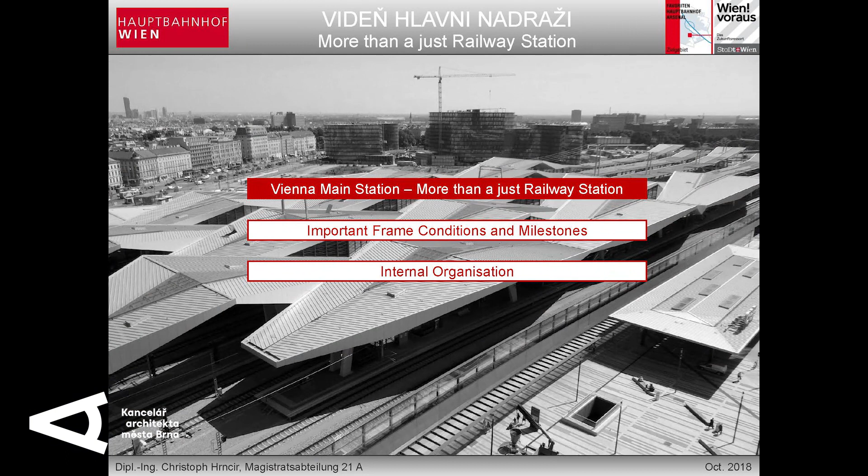So, Vienna Main Station, more than just a railway station. One aim of the project was to connect three railroad lines going through Vienna into one transport hub. In former days we had head stations in Vienna; now we have a European railway hub connecting all these lines at one point. It was very important for us to have a modern station building. The old South railway station was one of the most ugly station buildings in Austria. Now we have a modern, state-of-the-art station building fulfilling the criteria of a European transport hub.

But we don't only talk about the station building itself. We have a large development area of about 55 hectares, and within it we've built—many already finished—about 5,000 flats, maybe a little more, providing living space for about 10,000 to 15,000 people.

But not only a place for living and housing—we wanted to create places to work too. So it was one of the aims to get office buildings in this quarter. There are some headquarters, one of an Austrian bank institute, one of the railway company itself, opposite the station building, naturally hotels and so on. So a mixed-use quarter. We had infrastructure needs—schools, technical infrastructure, new roads had to be built, and so on, naturally public green areas too.

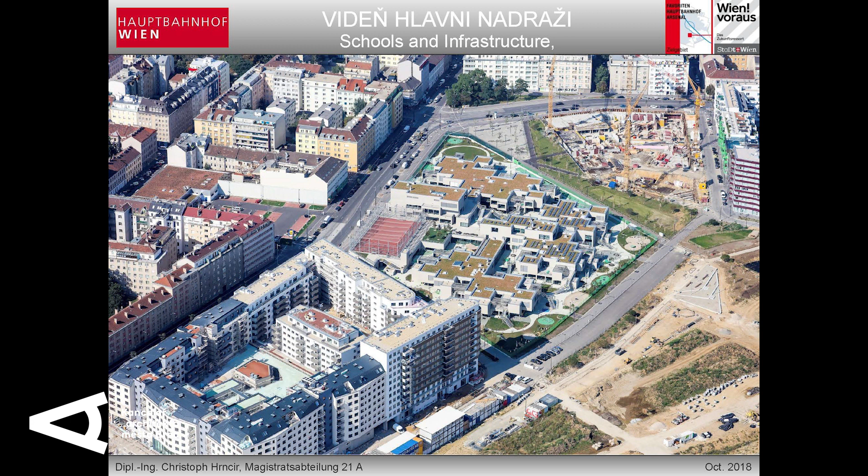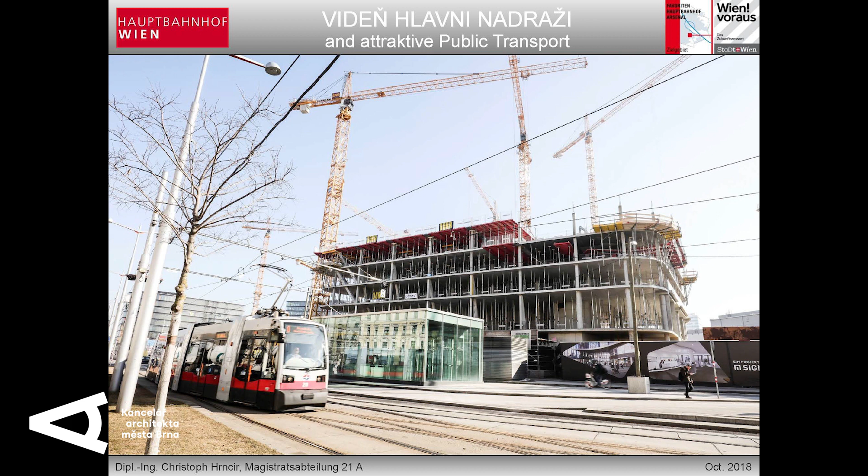The heart of the housing area is a 7-hectare public park, and as well new public transport. One project is the enlargement of a tramway line, for example, but also the connection of the station building to the underground line was a very important topic we had to deal with, because the old station was about 500 meters from the underground. Now you can go directly from the station building to the underground line.

So that's the overview of the project.

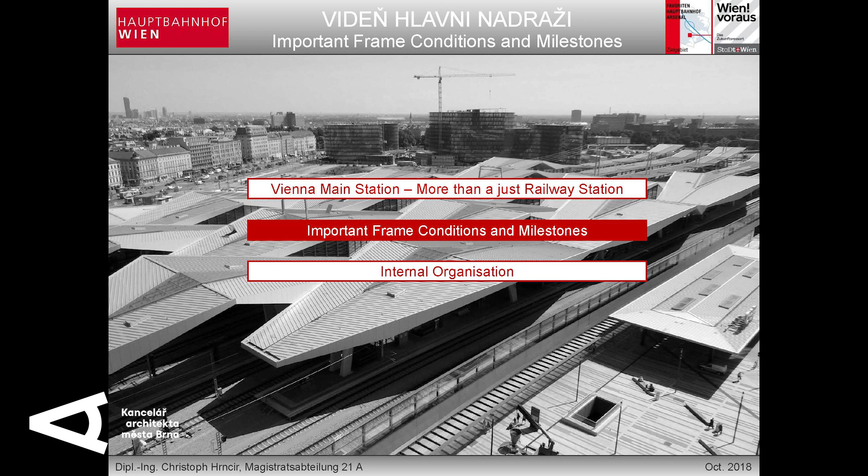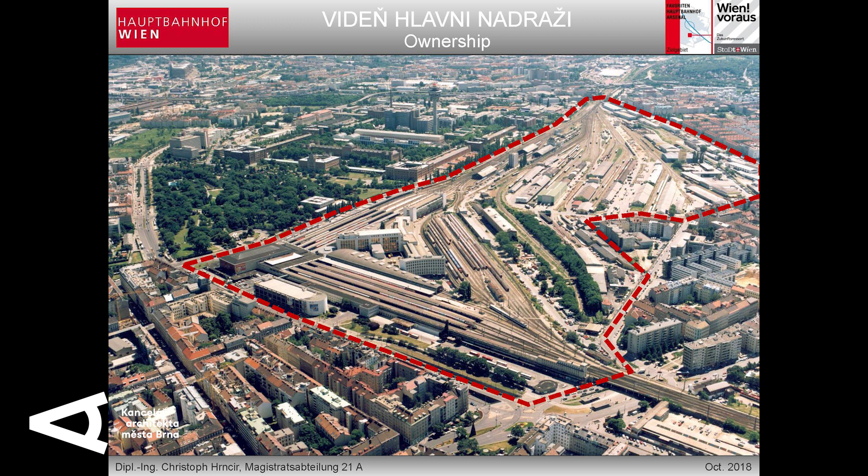What were the important frame conditions and milestones? What do you have to keep in mind when dealing with such a large project? First of all, the question of ownership was very important. The whole area you see here, as it looked when we started in 2003, was owned more or less by the Austrian Railway Company, with a small part by the Austrian Post Company. But the railway company bought the parts from the post company, so more or less we had one owner—which I think is very important, because it makes it easier to develop such a large area.

Another very important step at the beginning was a so-called letter of intent. Why was it important? It was a paper signed by the Federal Minister for Traffic and Transport, the mayor of the city of Vienna, and the director of the railway company, showing that each of the three main partners wanted this project.

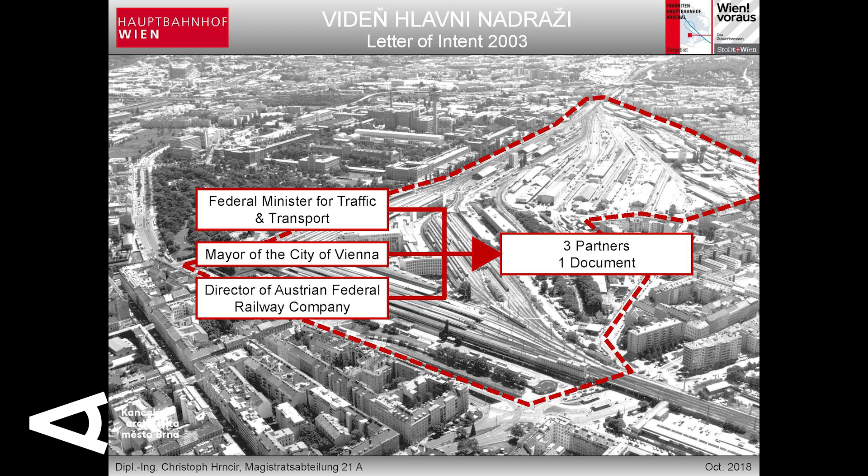There was also, at this time, a discussion about financing urban infrastructure, so it was fixed that the areas the city needed for the park, the school, the streets and so on, were given from the railway company to the city for free. That's one part of this letter of intent.

Also in this letter of intent, figures about density and so on were fixed, so that the railway company knew what could be built in this area, because one of the ideas was that the ground sold should refinance at least a part of the station building itself.

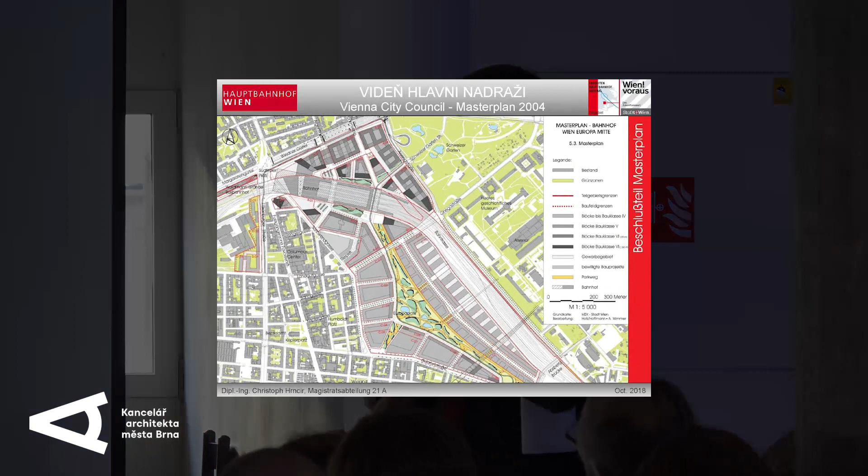The next step was a master plan based on an urban competition, an invited competition with 10 offices. At least 2 offices had to create a common master plan from their ideas, which was a dialogue, a debate between the architects, the railway company, and the city planning that took about half a year. At the end of this process, the master plan passed the Vienna City Council, a decision of all in our city council. We had 4 parties at the time, and all of them said yes to this plan, which was a very important step to have political consensus about this development.

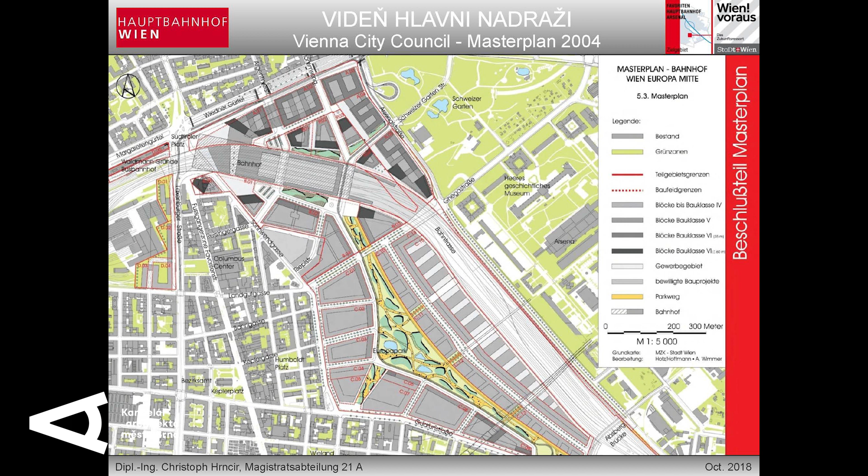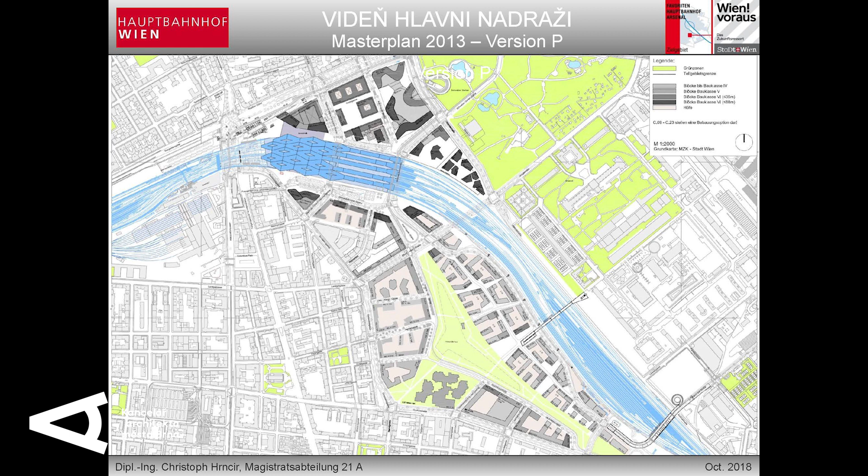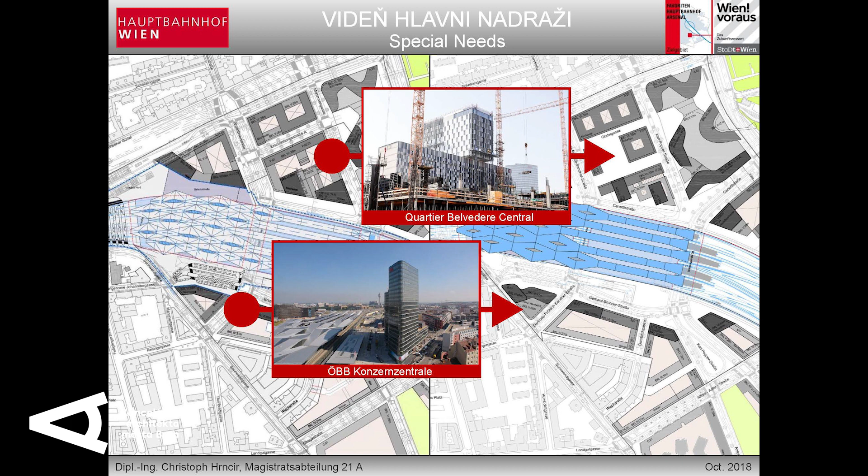Why did we have to change it? There were some special needs of investors, for example the headquarters of the railway company. They didn't know at the beginning of the project that they would build their headquarters there. We didn't know the exact needs, and there was an architectural competition, which naturally had some impact on the master plan. There are some other examples for this too.

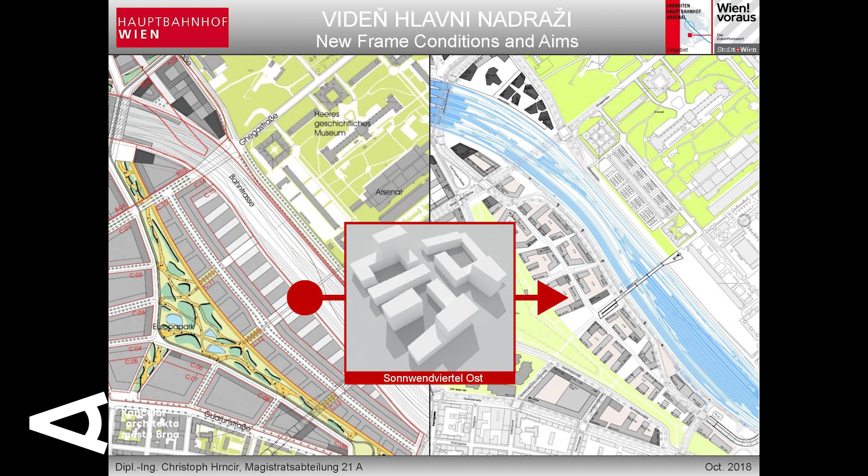Also the question of land use: in the beginning, in the original master plan, we had an area on the east side which was housing on one side and office, production, and logistics on the other side. Later on, we had a finance crisis, so production logistics wasn't an aim anymore, but we had the problem of a growing city. We needed space for housing and so on. So we decided to create this quarter into a living quarter, a housing quarter, which is actually now under construction. So this was the last part.

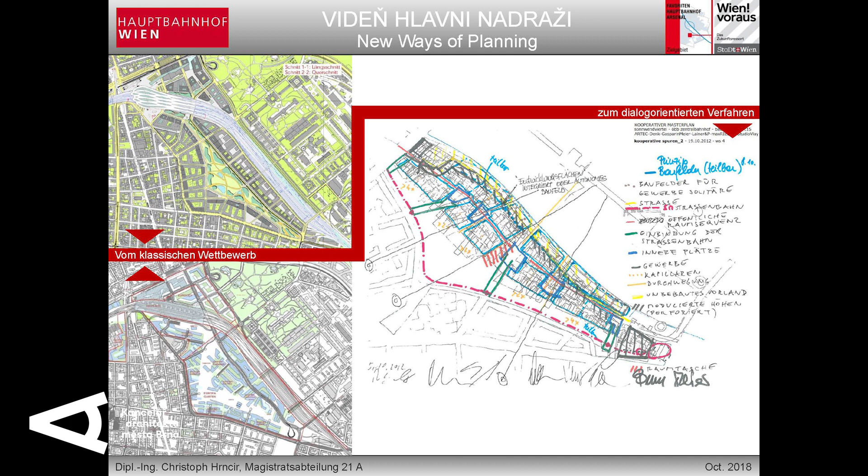It might also be interesting that the way of planning has changed over these 10 years, the different approaches. On the left side, you see the competition entries from 2004, and this is the plan created for the quarter on the east side, which was the last quarter planned or developed. This was not a classical competition, but a dialogue-oriented process. Planners didn't plan each against each other, but discussed about it. I like this picture because it shows the different ways of going on with planning together, planning in dialogue.

Last but not least, other things can change here too, for example the topic of traffic. In the original master plan, we talked classically about traffic, how broad the road must be to have enough space for cars and so on. Now we talk about modern mobility, the different forms of mobility, e-scooters, car sharing, electromobility, and so on.

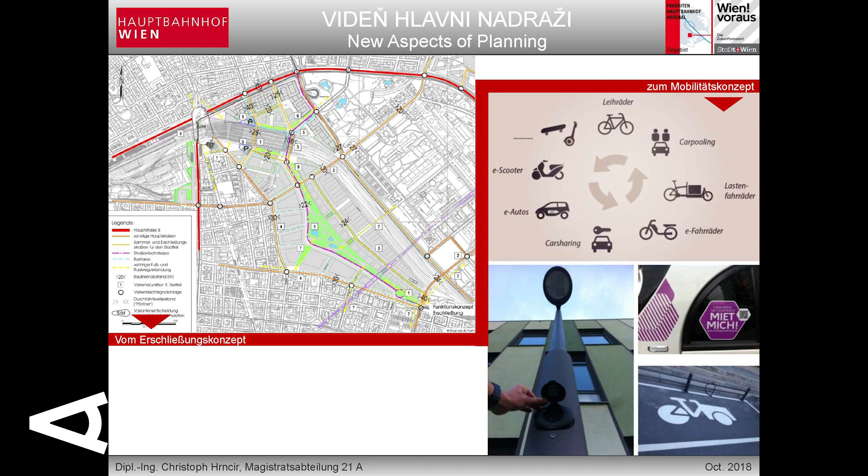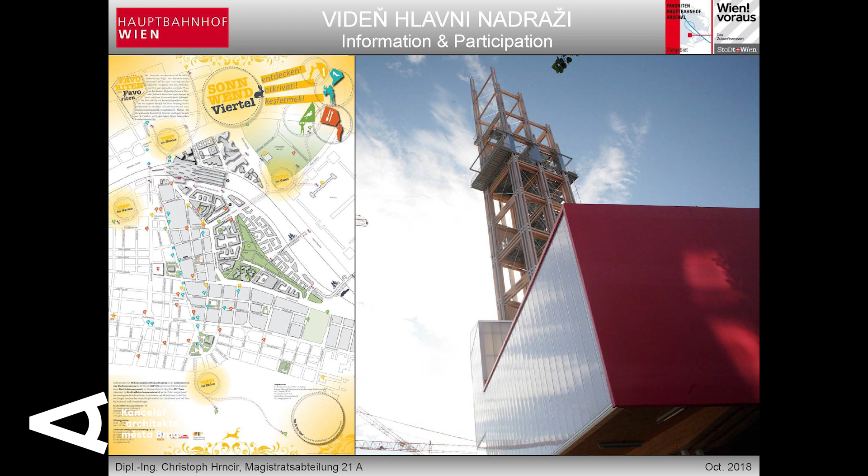What was very important, and I think it's important from the beginning of such a project, is communication with the public. You have to convey the benefits, you have to discuss critical questions with the public. You will need to explain certain developments, because we had a discussion about the high-rise buildings here, since they are not in the direct neighborhood of the city center, but there is a Baroque castle, the Belvedere, and the small distance led to some discussion about whether there could be high-rise buildings.

A great success, I think, was the information center that was built up near the building site, where people could inform themselves about the project, and this wooden tower where you had a view over the building plot, and not only the building plot but the city itself. This tower was a very, very great success.

Other forms of communication were platforms with local politicians. The station itself is in the 10th district, and we also have the 3rd and 4th districts here. So there were discussions with politicians of all these districts to keep them involved in the project.

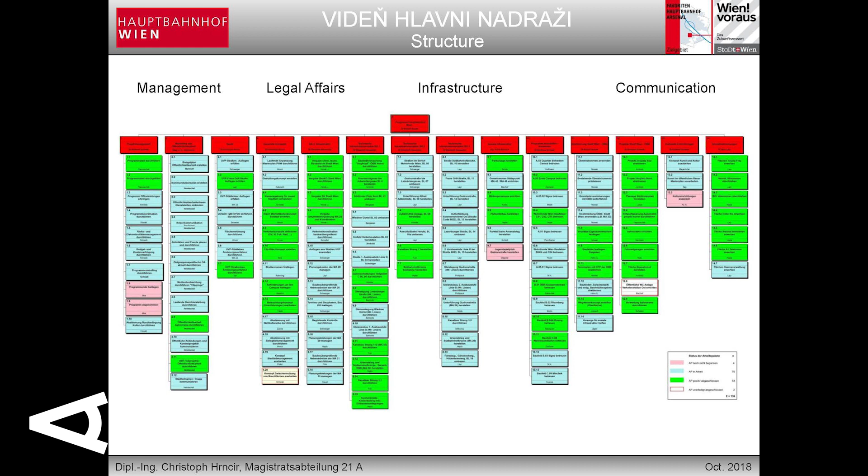So maybe at last, I will read that, or not really read - some recommendations, or things I have learned, because when I started in 2004 in the city administration, also the project started, so it was for me also a project where I learned very much.

So what might be important when you develop a place like this, and I think from the dimension your project is similar, from the tasks you also have the problem, the aim to organize the railway station and at the same time the city development.

First of all, I wrote partnership is very important. All stakeholders must be partners in the project, stakeholders and planners as well. There should be many discussions and debates, but I would recommend to do it in the team - it's dangerous to do discussion in the public. So first debate the things, then present the plan in the public.